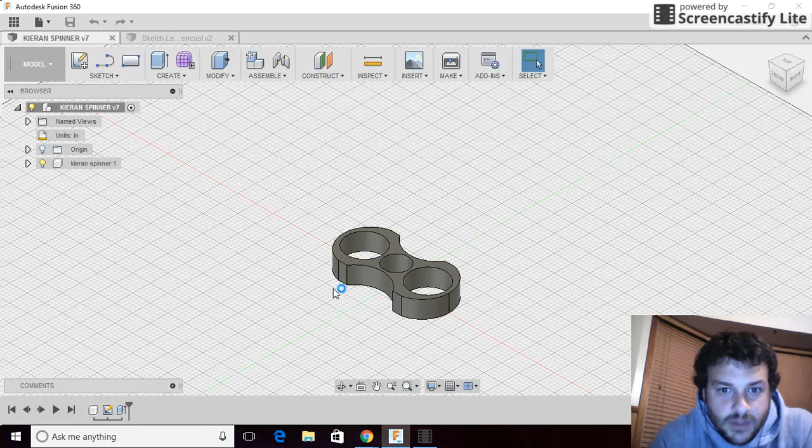All right, so this screencast is about our first attempt as a class project to make a spinner. So this is a handheld fidget toy. Kids were given a specific set of guidelines they had to follow. The stock that they were given is maximum 3 inches long, maximum 1.5 inches wide, and it is 1/2 inch thick. So this student drawing is a spinner they've created.

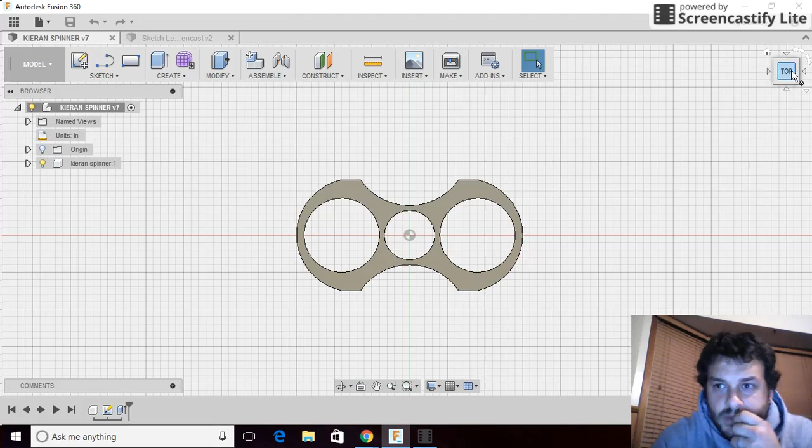The next major part of the criteria is this center bore is just slightly under 17 millimeters. That way it can be warmed up if needed and expanded so that we can press fit a ball bearing in, and then students will be able to hold the toy in their hand and spin it. So since the students already got a 3D model made, the next step to do is to set up all the CAM operations so that we can machine it in the Tormach mill.

So if we switch from the model browser to CAM, we already have a whole bunch of different operations created. Once we're in CAM, I kind of like to start looking at things from the isometric view. So if you click on the little home button, it gives you a better perspective view of what you're working with, and it really helps once tools come into play.

So first thing you've got to do is a new setup. I'm not going to click on it because I've already got one created for this project, and we've got a list of tools that are available on top of the red toolbox right beside the CNC. So all you got to do is just double check with me what tool number is what, so that we make sure we use the right tools when setting up the machine.

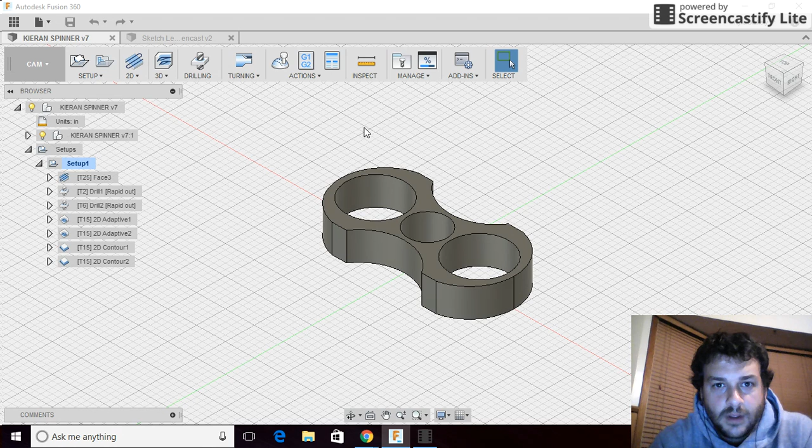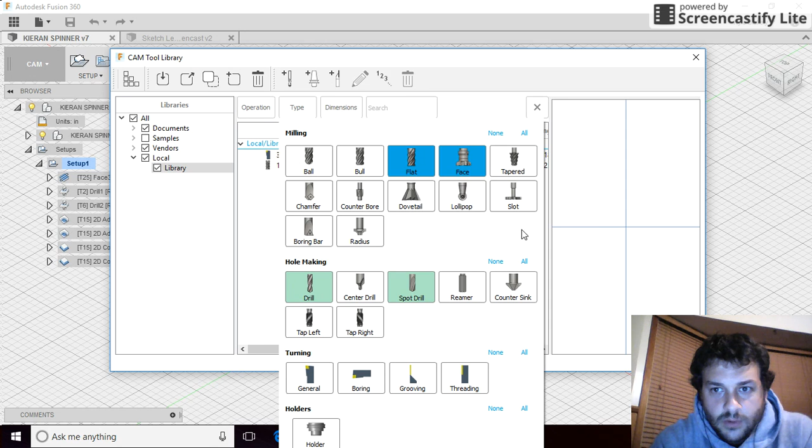So if ever you want to look around, if you click on the tool library tab and you highlight local library, you can choose the different types of tools that we normally have. So we have flat mills, face mills, spot drills, and then we can scroll down and look at different tools that are available from our school's tool library.

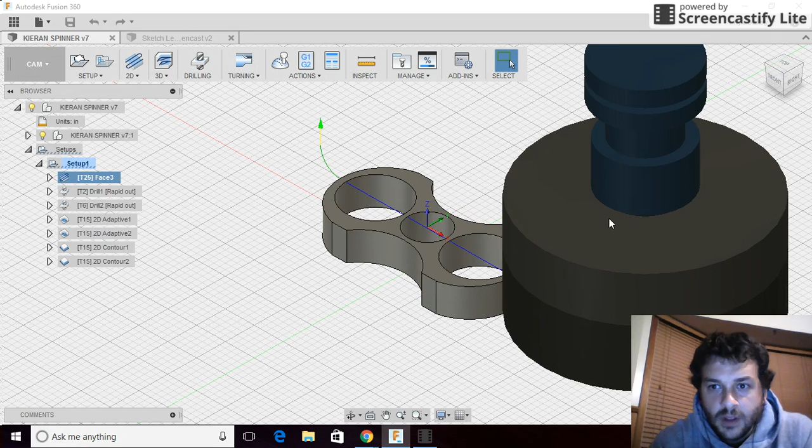And if we scroll through all of these different functions, we can look at what we chose to get this job done. So first things first, it looks a little bit silly, but it's a roughly modeled Tormach Superfly. So that's the Tormach tool holder and fly cutter. If I open up Edit for you to look at, the tabs always go in order. So whenever you choose a new operation, it's always the tool, then the geometry you want to machine, then the heights tab, and the passes and linking.

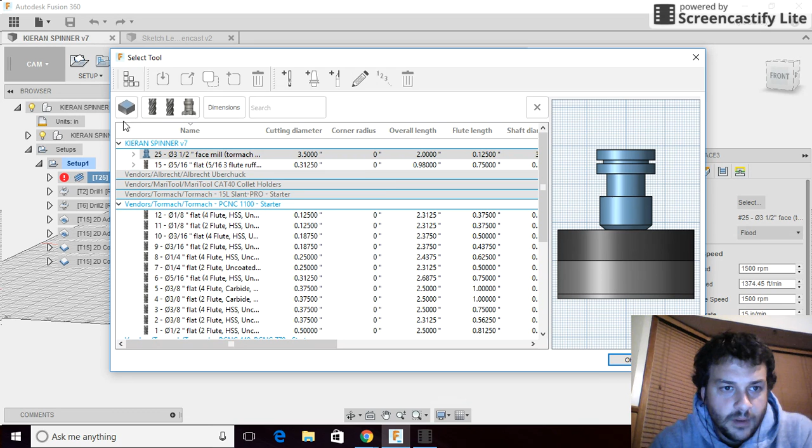So tool, you hit the select button, come on over, you have all the options that are available to us. So tool number 25 is what we've got. Our geometry is the size of the stock that we're using, 3 by 1.5 inches.

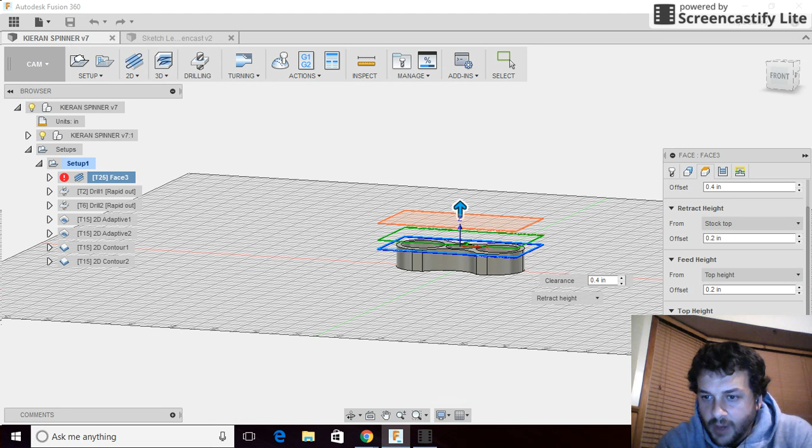And then for our heights, I left everything in its normal position just because I know that it's safe and it works well. We've got the clearance height, the retract height, the feed height, and then for what actually gets machined, you have the top height, which is the top of the stock, and the bottom height is the model top, but I've offset it down 20 thou. That way it'll come down and make a very slight cut. Turn on our stock and face that top off.

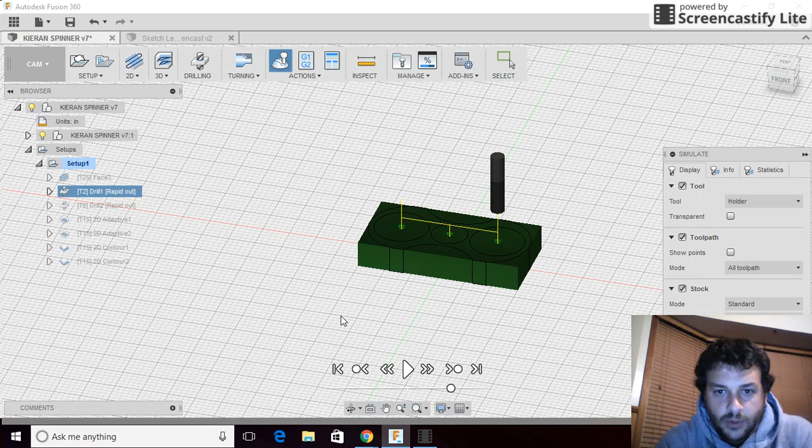Next past that, most of you guys in the class that have seen this already, we've got a spot drill routine. So if we click on simulate, it's our tool number 2. It's going to come down and spot drill all the holes. Past that, we've got a 1/4 inch drill, which is tool number 6. And so this will go through and drill all the way through the part.

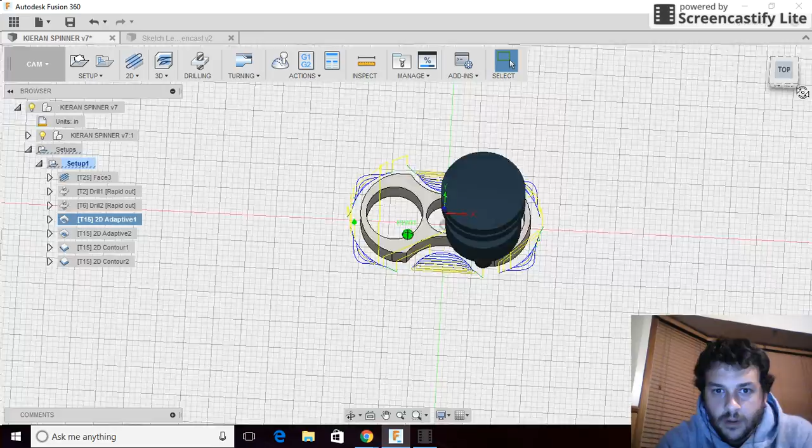That way, when we start using our 2D adaptive strategy, we don't have to worry about the cutter coming down and coming in contact with the hole and having to pocket really slowly. So our first 2D adaptive is around the outside of the part. However, if you look from the front view, you'll see that it stops 100 thousandths of an inch from the bottom. That's because that's the material that's being held in the vise.

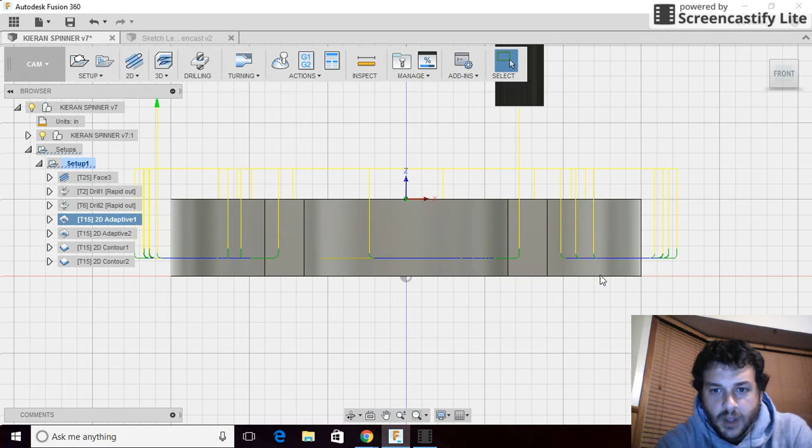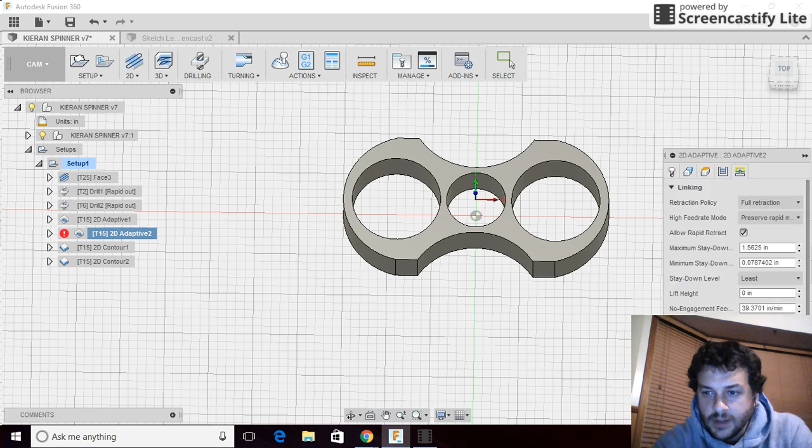Our second 2D adaptive strategy is these pocketing operations. The only thing I did different with this that had to be modified from the stock options is I changed the helical ramp diameter to 0.2 from the stock, which is almost 0.3. And the reason why I did that is because the center diameter of this hole being 17 millimeters, slightly under, and this tool being around 6 or 7 millimeters. It's actually the 5/16 cutter.

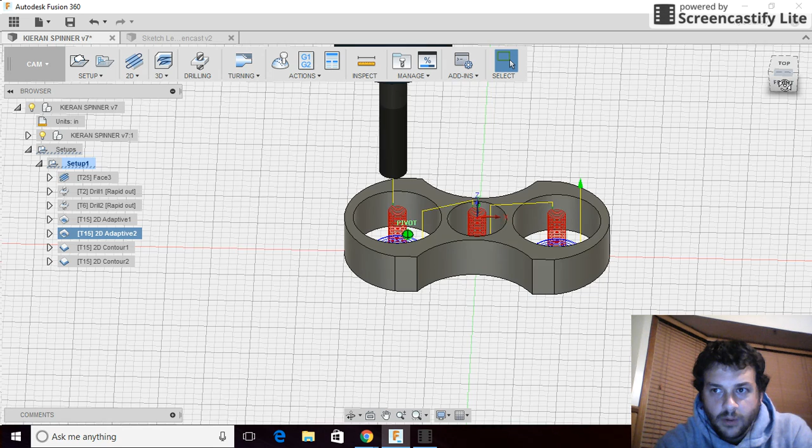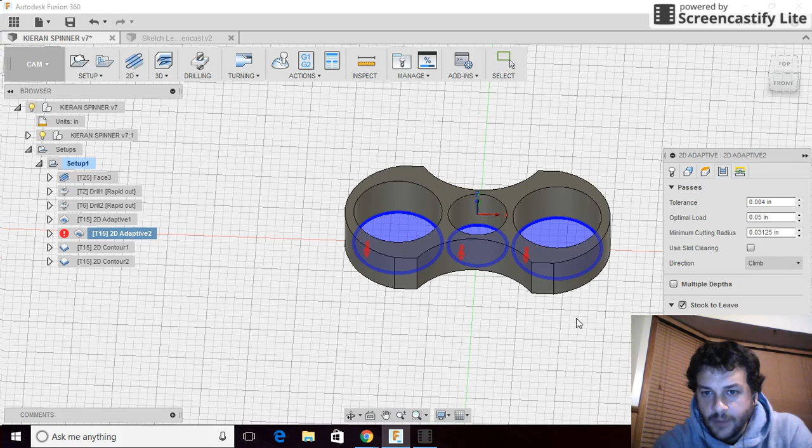I had to tighten up the circle that the tool drops down into. That way the cutter would lower into it. Otherwise, I use pretty much all the stock operations. One other thing I'll show you guys whenever you start setting up any of your own tool paths is the optimal load for tool number 15 is 50 thou. So keep an eye on that because that will control how much width of cut the cutter takes. And since in a case like this, we're going full depth of cut, we want to ease up on width of cut a bit so it's not too hard on the tool.

Then 2D contour will go in and clean up all the holes. And then an outside contour will go up and clean up the outside. These 4 flats are what we're going to use when we flip the part over in the vise because we'll have material left on the bottom. And then we'll be able to dial indicate the center of this hole in order to find our XY 0. And we can touch the top of the stock to find our Z0 and then finish contouring and facing the rest of the material off.

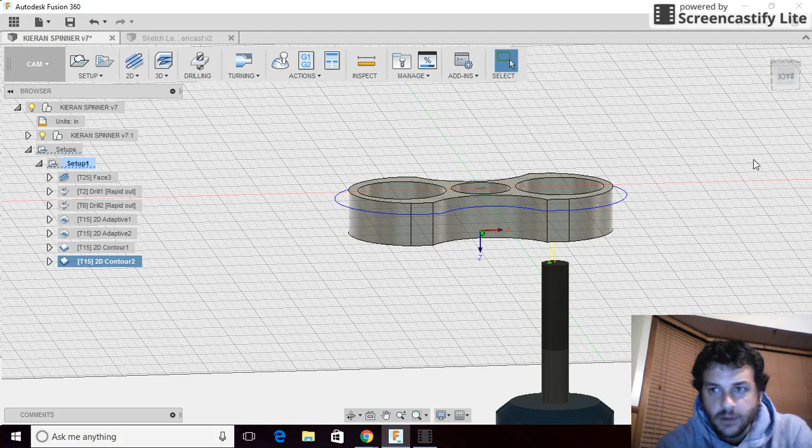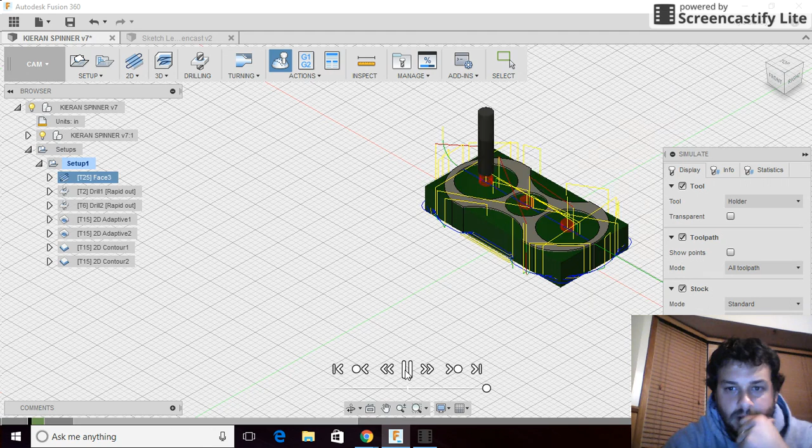So if we just flip this back around, bring it to the home position, the last step you guys should know is that if you click on setup, you see your stock and where we have to do our setup from. So our work coordinate system is going to be from the center of the stock. And if you hit actions, you speed this up a bit, you can see how the tool comes around and we'll clear out all the material. That was a little bit quick.

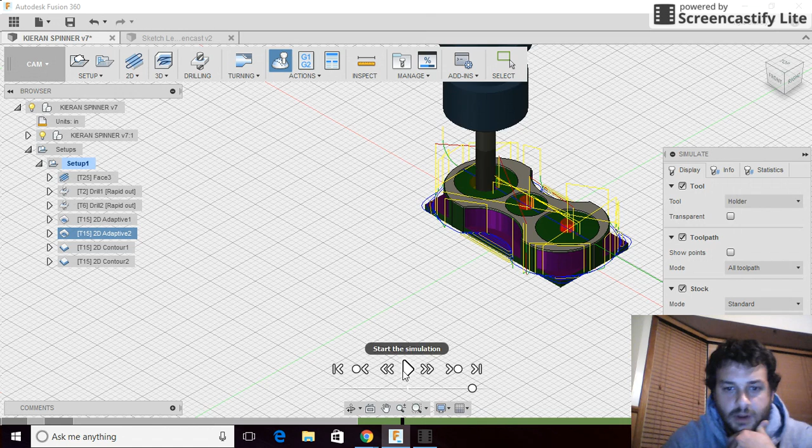One thing to note, and I'll pause it when we get there. For the first two 2D adaptive operations, the one that's going on right now and inside those pockets, I have 20 thou stock left around the outside of the part. That way there's material for the 2D contour to go around and clean up and make for a really nice surface finish. So this will go through and remove the majority of the material. And then the contouring operations, which are the last passes, they just go around and clean everything up.

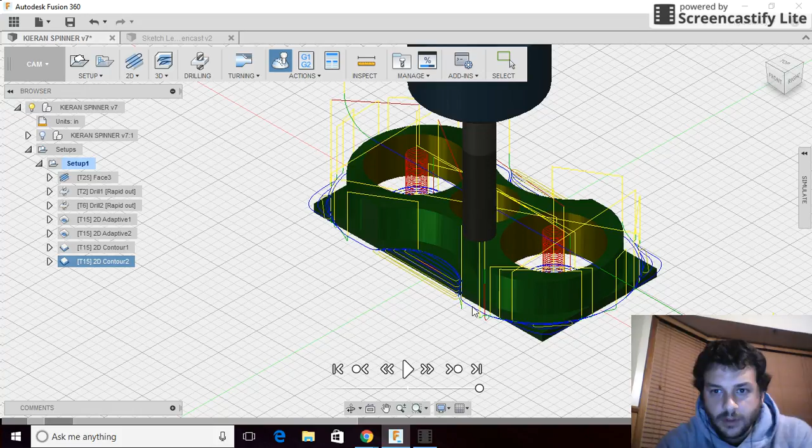So even if you hide the actual model, what you're left with is an idea of what the actual finished machine part will look like. So that's what we've got right there. All right. So we'll have this going in class tomorrow, and then as we kind of work our way through, the rest of you guys can get started on making your own CAD models of a mini hand spinner.